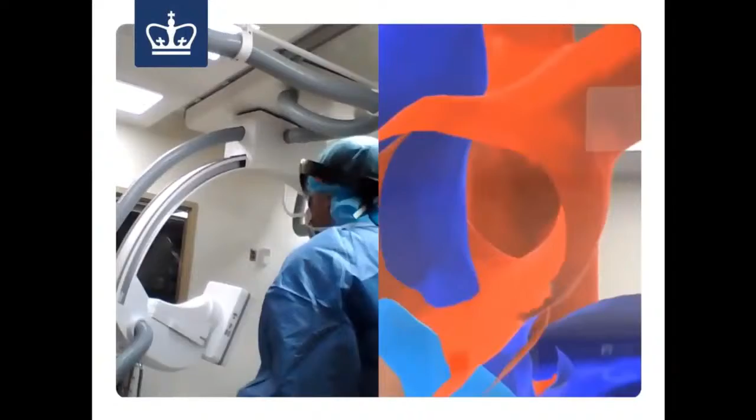So while working on this project, Alon was getting a little bit frustrated at how cumbersome and time-consuming it was to have to get all the scans, upload them, convert them, store them locally, be limited to making changes locally, and so on. And all he really wanted to do was just deliver these 3D assets to an AR device remotely in a convenient way that didn't require him to wake up super early in the day to have to get into the actual facility to get this done.

This inspired Alon to start talking to other people to see if other developers had the same issue, and they ultimately came to this conclusion that it was very difficult to deliver 3D content regardless of what it was, whether it was an AR experience, a VR experience. There really wasn't a way to consolidate everything on a back end in a central place.

With 2D content, there's really no problem. For web, there's Heroku and a few others. For mobile, there's Firebase and Parse, to name a couple, but there's really nothing for immersive. So who's going to build the same cloud platform for the same solution for 3D assets?

Yep, that's right. It is echo3D. That's what echo3D does. We are a cloud platform for 3D applications that provides tools and infrastructure for 3D applications, spatial computing, AR, VR, XR, MR, WebXR, and we support any 3D application, whether it's face filters, NFTs, game assets, or anything for the web.

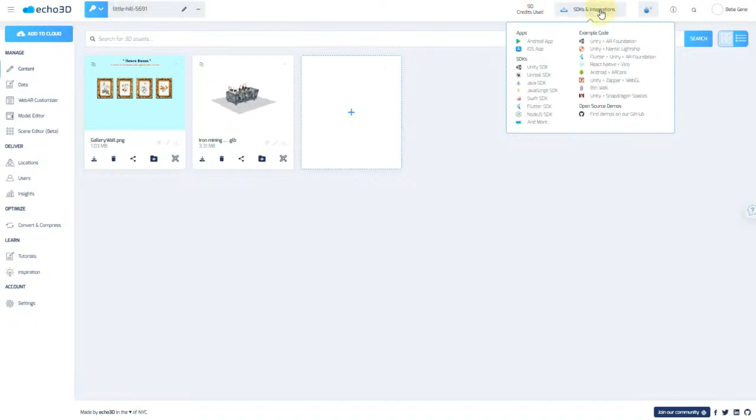Up here is going to be where your API key is. Over here, we have a list of all the SDKs and integrations that you can use, along with code samples and where you can find them. And over here, you could switch the interface to dark or light, totally up to you. And over here are your account settings and the option to log out.

The search bar here at the top will let you search for different 3D assets, and you have the option to switch to a list view over here. Here on the left are a bunch of our other features, and I'll go through those shortly.

So to start, you can click on Add to Cloud, or on this empty content card, it'll be the same effect. This is where you're going to upload all of your models. If you wanted to use anything from our library, you're more than welcome to do so over here. You just type in whatever keyword you're looking for, and it'll pull up different results. Some of them are 3D, some are 2D, some are video.

And alternatively, if you wanted to connect your Google Drive account to this, you could do so by clicking on this. So for the sake of the example, I'm going to upload my own model, which is this really beautiful lounge chair.

We have a few different ways that you can view the model. The first way is if you wanted to see this on the floor, with a mobile device you would scan this QR code and the 3D model would appear in real time on your mobile device and just instantiate directly in front of you. If you wanted to change the target to see this on an image, it will immediately instantiate on top of this QR code. And if you wanted to see this on a face, this would instantiate on somebody's face once it detects all of the features are there.

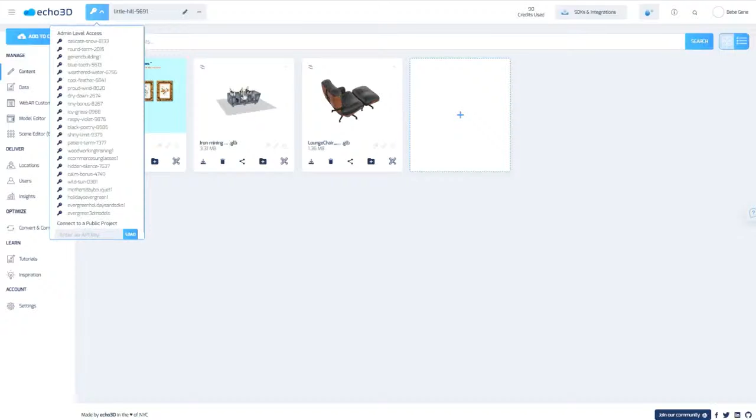Over here we walk you through the web console, which is what is happening over here, and everything else ranging from the API to plugging in with Unity and Unreal, Scene Viewer, AR.js, Face AR, React, just to name a few. Basically, if it's 3D, we are integratable, so please feel free to check that out.

We also have a convenient search feature, and we have the Slack discussion. Our Slack channel is a fantastic way to get in touch with us - it's always active, there's always somebody online. So if you join our Slack channel and join the support channel, you'll be able to get an answer very quickly.

And so let's tour the console. Everything here on the left is dedicated to help you optimize your 3D experiences, give you insights, help you with whatever tools that you may need, all in a very convenient place.

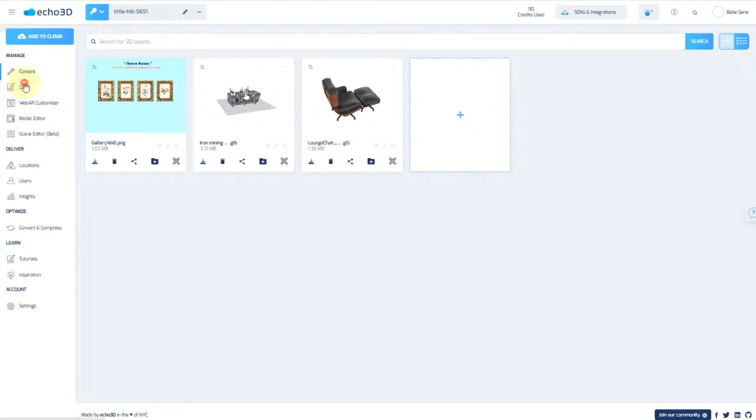So if you click on content, this is going to take you essentially to your home page - this is where all your content is going to live. Over here, when we're talking about data, this is referring to the global data for each of your items, which will be assigned to every single one of your 3D assets. Or if you wanted to do individual metadata for each of your content cards, you could do so on each of the object names.

So 3 objects were in our console, right? For each one of these, we go down to data - we're able to add individualized metadata for each one. For example, if I wanted to add something like change the scale by default and then change this to 2, by default everything is going to be doubled in size every which way, X, Y, and Z.

And the same concept for each of the individual items. We have a bunch of predetermined metadata that you can choose, or you can even add your own and fill in the value right here.

When we go down to the Web AR Customizer, this is a really nice feature to create something that's branded. Here you're able to do a custom background image, which shows up in the mobile background preview. So when somebody scans or pulls up your AR experience on their mobile device by QR code or by link, they're going to have a 360 image that surrounds it. So you're able to add that. It's highly recommended to do a very high resolution image because it is stretched to 360.

You're able to upload music, and this starts and stops anytime there's an input. So let's imagine that this is your mobile device. This is the preview. If you tap on the screen, it'll start the experience and the audio. And then here you're able to do screenshots.

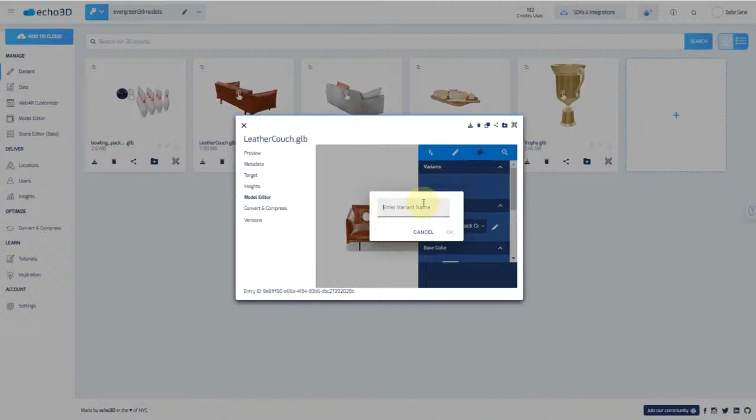Next we're going to go over here to the materials where we can create a variant. What this does is it basically creates a different version of the same model based on the changes that you have here. And like I mentioned earlier, it won't change the entry ID or the API key. That means you can have different versions of the same model and update them directly through your browser, and all of the changes apply directly. So it's basically like having several models in one. We're going to create a couple of variants and I'll show you how these work.

Okay, so let's load them and make our changes. So we labeled this one black couch, which means, yes, we're going to turn it into a black couch.

So we're going to go down to where it says factor and turn this leather couch into this beautiful shade of black. Then we're going to go back over here to the first panel and we're going to apply to entry. But first, I want you to take note, this is a leather couch in the background. So once we apply to entry, it's going to give us a pop-up and it's important that you wait until it makes the change.

And there you go, it automatically updates and now you have this beautiful black leather couch.

So let's do the same with the red leather couch. Once we change it, it goes back to the default so we can get a fresh perspective on what we're working with. And now we are picking the reddest red and we're going to go back over here and apply to entry again. And as you can see, it automatically updates, and now you have another variant.

And all of your variants are stored in the dropdown, so you can oscillate between all of the ones that you've created.

After you've created your different variants, you can actually view them by typing in the share link in your browser for either desktop or mobile. Once you enter it, on the top left, you'll see the option to view the different variants that you just created. So there's the red couch, and here we see the black couch.

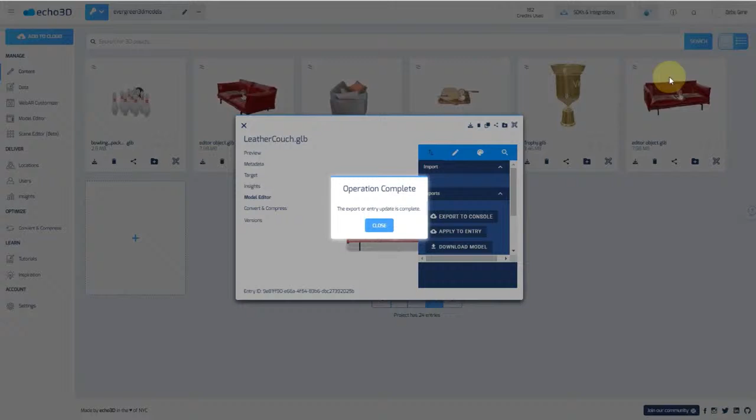And right here in the background, you can see now we have another object. And if we wanted to download the model...

It just downloaded as a zip. And lastly, over here, we have a JSON format of the same 3D model. So if you needed that, it's available to you right over here.

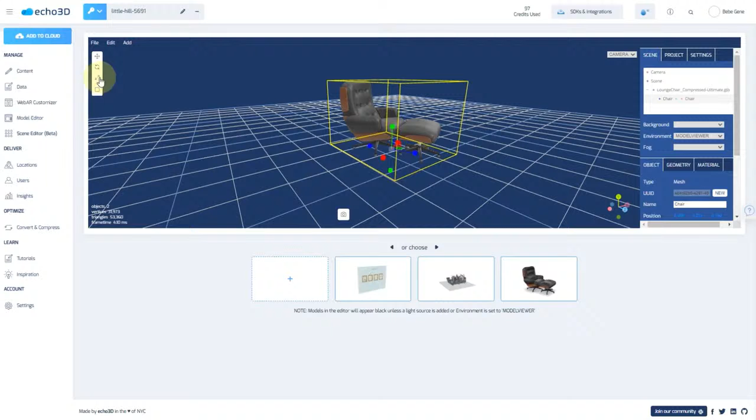And then moving along to Scene Editor, which I think is one of the cooler features that we have. If you click on your asset, it will immediately add it to the scene. And over here, each of these grids is about 1 meter, so you can think of this in terms of scale.

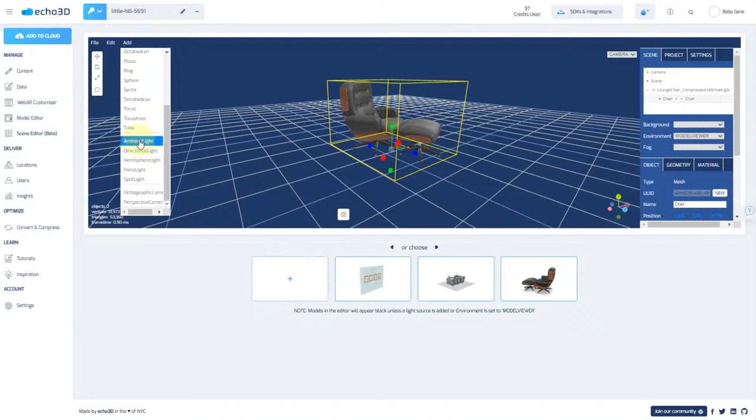Over here, we have the option to create a new scene, which will reset the scene. If you have a larger file or something not yet in the project, you can import it. And these are your export options.

You can export the object as a standalone. You can export the scene. So say, for example, you have a lot of objects that are in the scene, and you wanted them to be exported as one object, you could do that with that. You can export the file, or you can, again, export to console, which will put it back in the content section.

And over here, these are your controllers. So if you wanted to modify anything, you just click on the object, and this will be your directional capabilities. So you have your X, Y, and your Z, and you have the same for the rotation. If you wanted to work on scale, that's a feature as well.

And then here under Edit, you're able to make clones, delete, center, clear the history, and fix any color maps. And then here, a really nice feature is if you wanted to do a group, so you could create smaller objects within a larger object, and we have tons of primitive shapes that you can pick from as well.

We also have different lighting that you can add and different types of perspective cameras. So let's add a box, for example, just like in Unity, where you can add a basic object.